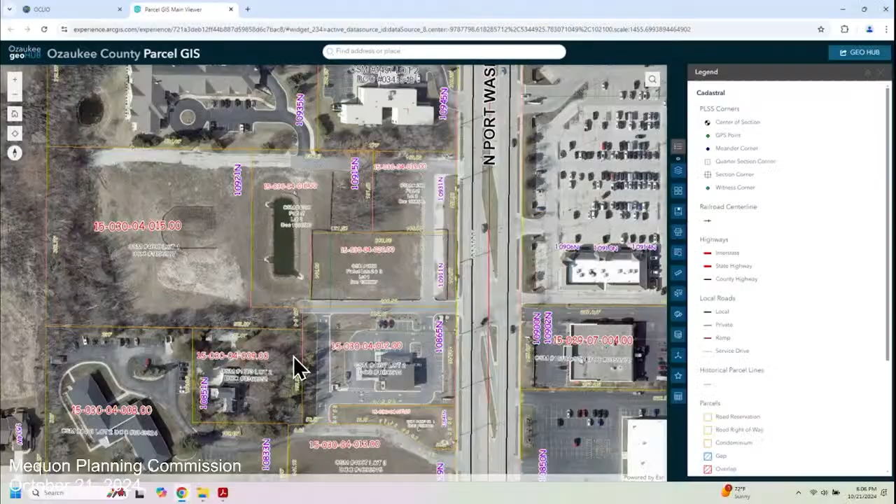There's been several accidents at this intersection. I don't want to point any fingers, like it's because of development and all that. That's the nature of development, okay.

Then the state or Ozaukee County put in a left turning lane on northbound Port Washington, turning into the Landmark Bank / Arby's area. Now when you have a car there trying to turn into, I don't want to pick on Arby's, but I'll pick it because everyone knows where Arby's is.

You turn into Arby's, somebody's trying to come out of Landmark, somebody's trying to get out of the pavilion, and what do you typically have at a daycare center between 4:30 and 6? I don't know the exact times, but that's usually because people are coming home, they're rushing, trying to pick up their kids.

So the intersection is going to become very, very busy, and I'm really concerned that we're going to have a lot more accidents there. I mean, it happens at least 3 to 4 times a week.

We can hear inside our facility people laying on their horns and screeching the brakes. We're waiting, we all kind of wait for the bang. The intersection is getting too many cars going through it without it being controlled.

I'll be upfront with you, I don't think a controlled intersection would be the right thing either, because I think it would end up backing up traffic all the way down the boulevard, all the way into Sendik's. So I don't think a controlled intersection is the right thing, because we already have a lot of controlled intersections on Port Washington. What I would like to propose is that, because it's a less used crossway...

...to divert the child daycare center traffic behind Landmark all the way to the road that has the car wash on it, and have them go through that, because that links on the east side of the road to Stein Gardens. And Stein Gardens has multiple egresses and ingresses, and quite frankly, Stein Gardens is busy.

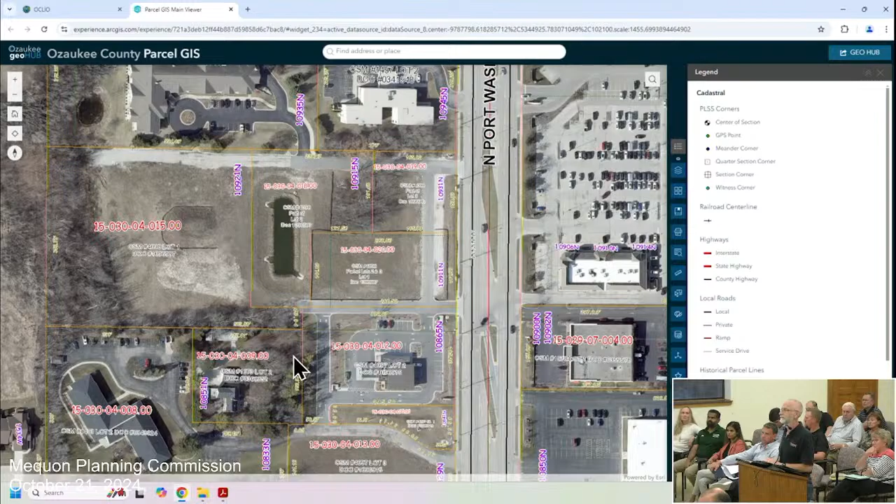Unless it's a doggy daycare, then I would push back. But that would be my only concern, and I believe there is a road behind Landmark that allows you to divert the traffic there. I just wanted to voice my concern, and I do appreciate you taking the time to listen to me. Thank you. Great, thank you.

We'll address that in the staff comments and talk about what our options are. So I think we have a motion and a second to close public hearing.

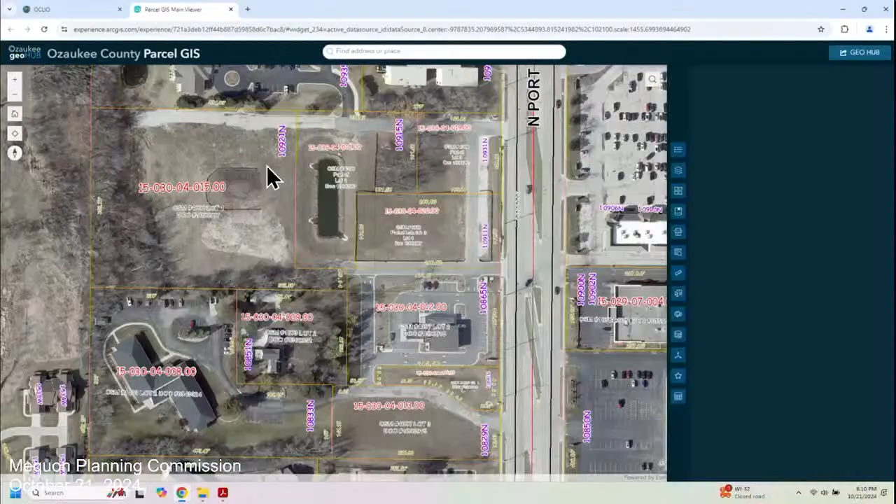All right, we're now taking up that item. I guess before I get to the report, I have the ortho up of that area, just to give some site context. Basically, the facility will be going into this location in the back here.

And then, as you recall, at our last meeting, we approved the concept plan amendment to split this in two. So this lower part will remain vacant.

In terms of access, this is a PUD. We established access a long time ago with this project. We have an access point to the furthest to the north. This is right in, right out. There's cross access through here.

This is the main lane I think he was speaking to. There's also a lane here that goes down, and then that basically just comes out on Port Washington Road next to the car wash, which he was speaking to.

I think what he's asking is to cut this off somehow, and I don't think we'd support that. I think the way this is laid out, it gives customers at any of the different facilities multiple ways to get in and out in case there is a backlog. So if the childcare facility is here, they would have the ability to go out this way as a right in, right out. They'd have the ability to come through the middle, and they'd have the ability to come through here. So we're providing 3 access points for this development and for all the other developments in the area.

I'll also say that this is a county highway. We don't really have jurisdiction over this road. They approved the curb cuts at the time when this was originally established, so I'm not sure if it'd be up to them to determine whether any improvements are needed to that road. So before I get into the report, is there any questions about this access issue that I can address before I get into the actual meat of the report?

Alderman Parrish: For the Port Washington Road corridor study that Harwood Associates is working on right now as we speak, nor has it been approved yet, so we can certainly, we had a business owner express some legitimate concerns. It certainly is a very busy, uncontrolled turn, so everything he's saying is correct. I would be curious what our consultant would say, and maybe we even did something already, and we just haven't.

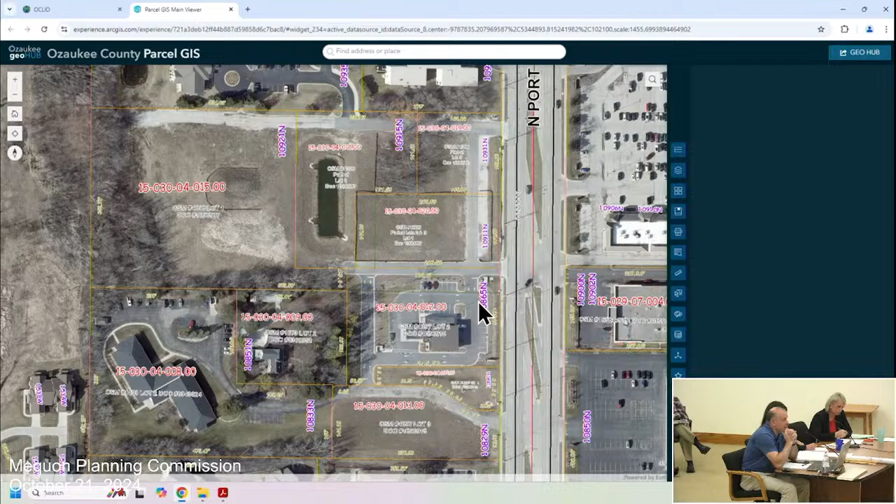The project for Port Washington Road was to try to pick spots that we felt were troubled intersections. At this time, this one did not raise to that level when we started, and there was no concern about it throughout that process. So this would be coming in kind of at the end of that process, basically. But we can talk to the county and see if they have any plans or concerns, or if there's any incident data there that we can maybe look at to address the issue in the future. I just don't think we can really tie it to this project because the PUD basically showed the road network.

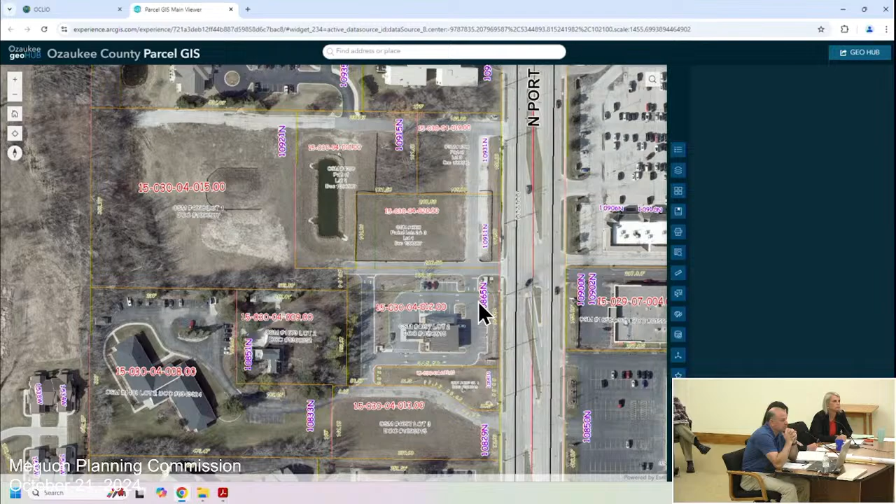No, I agree. It's separate from the project, and we haven't gotten into the presentation yet. I think the applicant has a bunch to say as well.

Jack, the request is that we consider a no U-turn sign at that intersection. So as we're reviewing the Port Washington Road corridor, as well as considering reaching out to the county, we could inquire as to whether that would be appropriate there or not. And regardless of this business going in or not, I think that would be a reasonable place to request that. They can make a U-turn just the next intersection down, no problem. Come back through where there's less traffic trying to get in and out of a busier complex.

Yeah, that we could request. That's not an issue. All right, great.

Commissioner Chorn: I think it'd be a strong suggestion that the daycare just inform the clients that there's multiple ways of getting out. Give them information so should they run into a problem, they've got other options.

Commissioner Barnes: I'll just speak as a former traffic engineer. I concur with what the current existing condition is. I'm sensitive, I understand what you're saying, but a signal would not be warranted here, even with the new traffic volumes from a numbers and collision basis, et cetera. And we need to be aware that a sign such as a no U-turn sign, I'm not opposed to it, but the reality is that if somebody wants to make a U-turn despite a sign, they're going to make it. I'm not saying that's correct, but it's real.

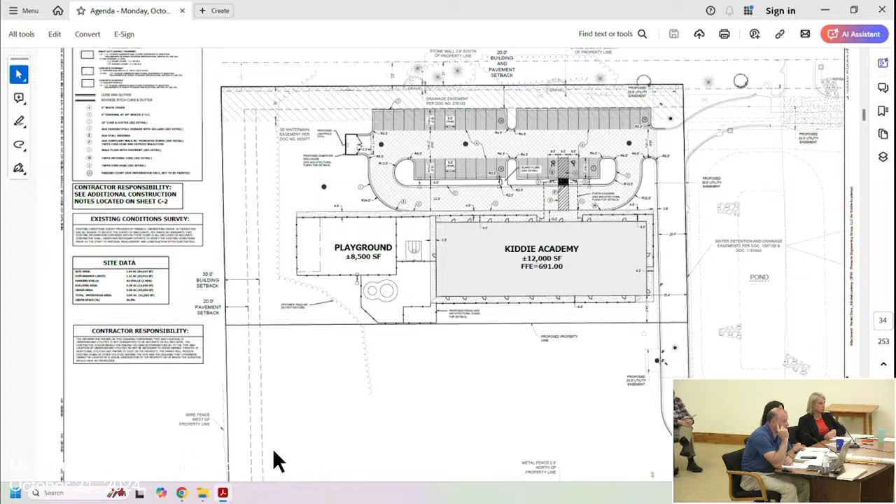Okay, additional feedback? The applicant, do you have anything to say?

Doesn't sound like there's any real objections to what the plan is. The majority of the discussion is just on the traffic, which isn't tied to your application one way or the other. Yeah, if you don't mind, if you can hear me. Sure, yep. Mark Seidel, Pinnacle Engineering Group, 20725 Watertown Road in Brookfield. I just want to speak real quick to the traffic item, just to give some color and background.

I was part of the design team that did the original overall development package. As part of that, I think it was 2018 or 2019, a rather comprehensive traffic study was undertaken and submitted to the county for review. Just to give a little clarity, this back parcel was once slated for an athletic club of 30,000 square feet, which is a lot higher density and higher trip generation than a childcare facility. At the time that was submitted and approved with the county, improvements were made to Port Road. So I just want to throw that out there, that the traffic study was complete and has a lot higher density user than what's proposed today.

Great. Staff has conditions on this for approval. Are you amenable to all the conditions listed by staff?

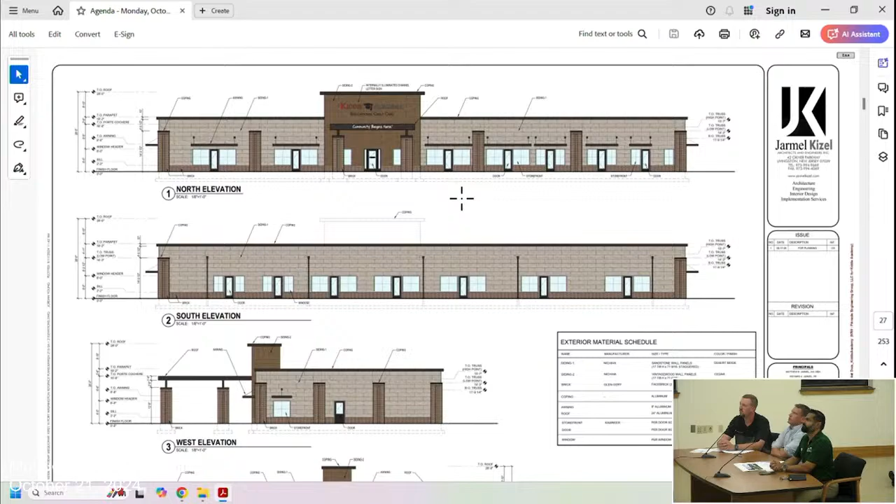I think one that we'd like to discuss is the front facade under the portico, where we show the wood grain lap siding coming down the front. I believe, Jack, you were asking about having brick coming up near the doorway underneath the portico.

No, I talked to the owner a little bit about this. I think there's a little confusion. Actually, my recommendation is for this whole middle section to be brick instead of the siding. There's a brick ledge that shows at the bottom, and it transitions into siding about at the same level as the rest of the brickwork. I just think as a focal point and an entryway into the facility, this would be more appropriate to be a primary material like brick.

So I think they're objecting to that, basically. I'll let Marty chime in if he likes. Commissioner Chorn has thoughts on this.

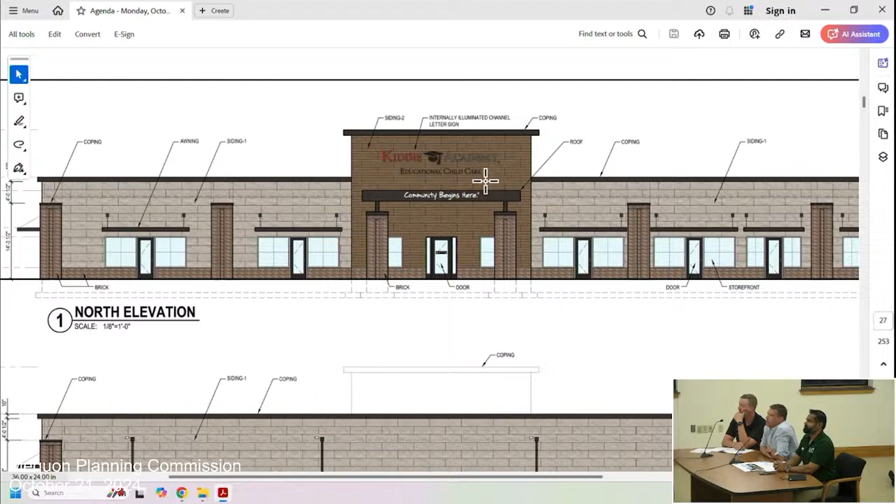Can you talk into the mic a little closer? I hate to argue with you, Jack, but I think the siding looks better. It's a different material, it's a highlight, it's a focal point right there, and I think it looks attractive. Like I said, with architecture, it's always subjective.

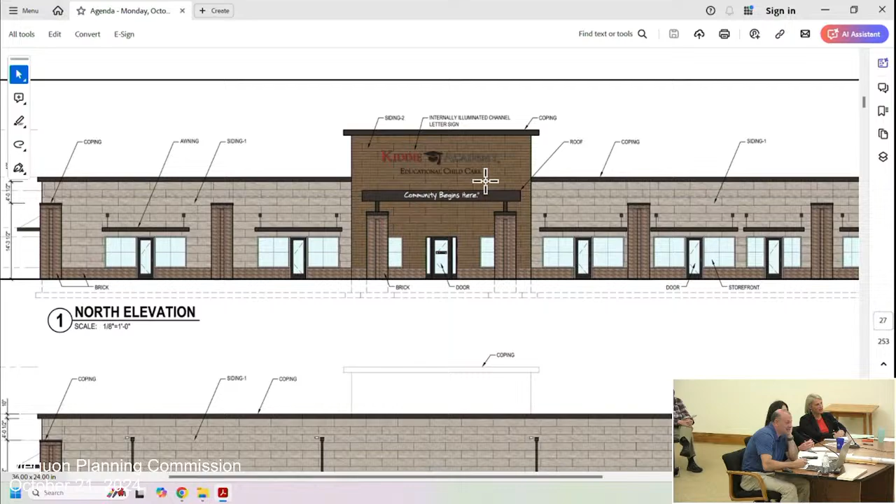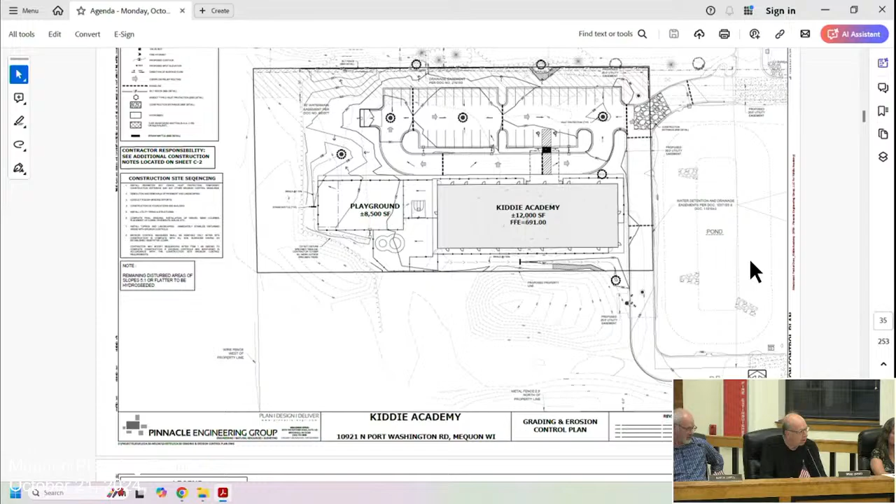Commissioner Barnes: Yeah, one other question I had was—I know one of the common challenges of a facility like this can be the parental drop-off and pickup, and the traffic routing through the site and backing up, if you will. Here we've got plenty of internal roadway, but my question is, because I didn't see anything in here, are you planning to sign or show it as a one-way only routing for parental drop-off? And how's that all going to work in terms of what I could foresee as some occasional congestion at morning drop-off or those kinds of things?

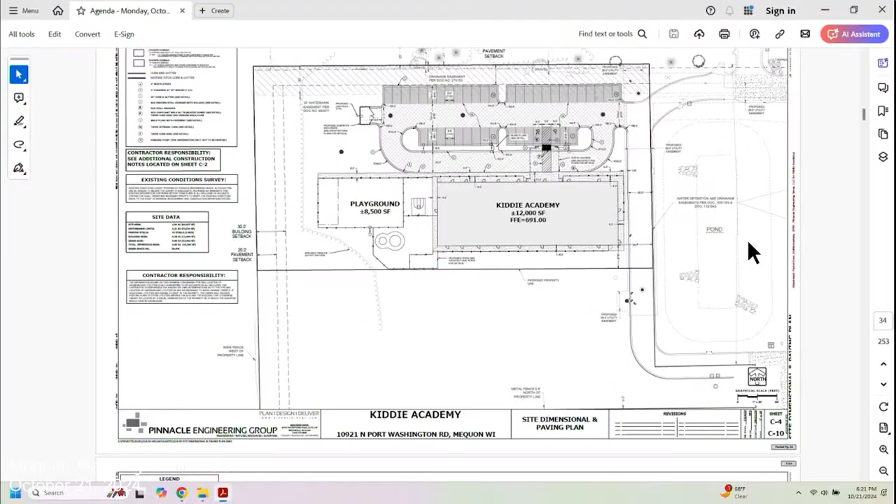Speaking of that, the way we had it in Brookfield was a turnaround at the entrance, and the highlight is that we mark with arrows how traffic flows within the facility. Safety of parents and kids has always been a prime concern, and in the city of Brookfield we are right off Capitol Drive.

Yes, traffic is fast on Capitol Drive, and while we don't have a slow-down lane, parents have known how to get onto the shoulder and into our facility. Capitol Drive is a DOT state highway. So I hear what the concerns were.

We've tried to address it in whatever ways we can. Just as Mark said, a study was done in the past for a larger facility, but in our case we have more than one way for parents to come in and out. The flow of traffic would be a turnaround: they come in from the top, come down, and go to the bottom to drop off their kids.

The portico provides a great place especially for parents of infants, where in rain and snow they don't have to take the kids outside in a car seat and get drenched along with their kid. That's been a great thing for our parents in Brookfield, and we've learned through that.

When they come, we don't allow parents to use that as a parking space. It's more like come in, drop off, and then move out—it's a moving place, not a parking place. Anyone who wants to park, we highly encourage them to go and park in the parking spot. If they want to meet or talk to our staff, they should park in the parking spot and then come in. That will not be a parking place.

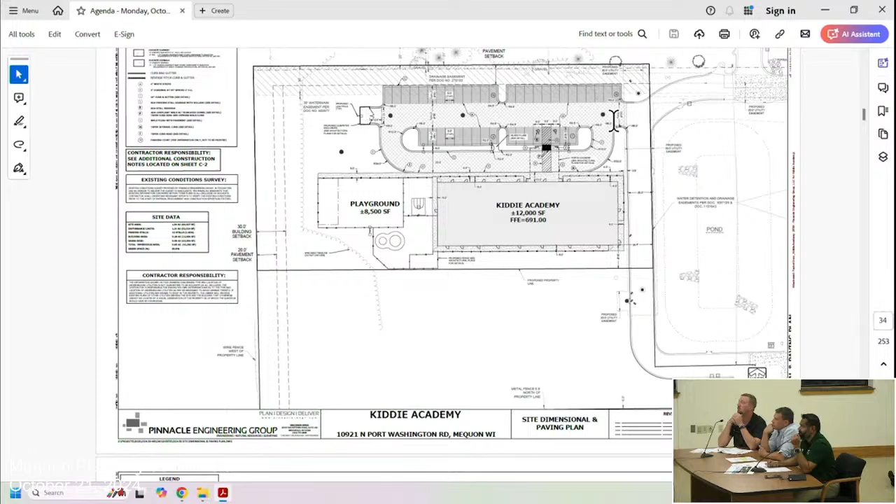Thanks, that covers what I was asking about, but I'm still a little concerned about the drop-off in the morning or pickup. Despite the one-way marked pattern, I know in a lot of areas parents like to take their kids into the building, and it's one of those things where a habit develops and congestion begins. So my question is, how do you intend to address that? What I'm guessing could be a likelihood, even over time—sure, there are early conditions, but over time there could be congestion in terms of getting in.

So with the parents, I can assure you on that part, we want safety of all our parents. We say that every kid is important in our daycare. It's not that any parent is special, any kid is special, right? It's everyone follows the rules.

So when they enroll, on the very first day, we let them know where the parking spot is, how you turn around, what exits you are going to use. We tell the parent about it, so there's no room for error where a parent would say they weren't aware. We tell them how we can make this place safe for kids, and that's the whole point of spending this much, having clear signs showing it to the parents.

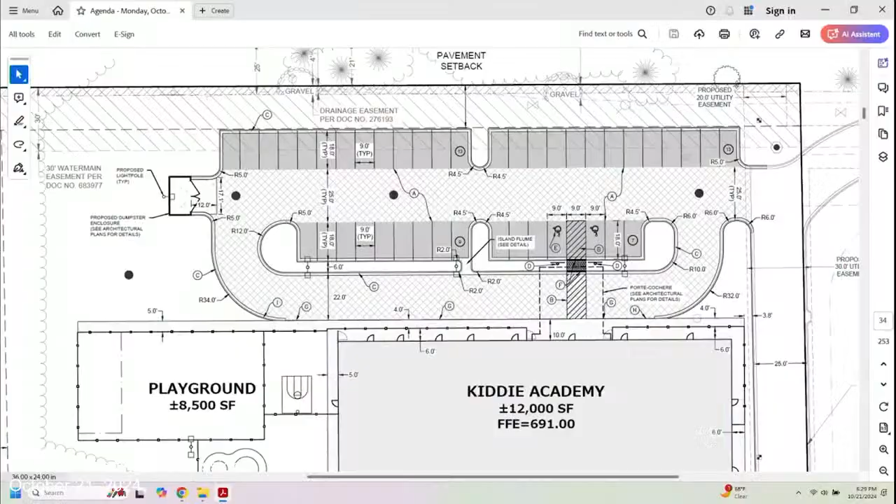I just want to make sure we're all on the same page with some of the recommendations. There's a sign waiver for a couple of signs. We're only recommending that the one waiver be granted for the height of the main sign. I can get to that page, I think I have to find it.

Call out the second sign if you could, please. Is that the 'community begins here' one? Yes, that's just a tagline, I don't think that's us. Well, it fits, and I'll show you the rendering. So this is what they're requesting: it shows the main sign located on the facade and then the second sign here. Our code only allows one sign, so this would be a secondary waiver sign. And then they're also looking for a size waiver for this sign, about 13 square feet larger than what's allowed. They're also looking for a height waiver.

The only thing we're recommending is the height waiver, because it might be a little low and could get blocked by that facade if people are driving in. But we don't see any hardship as the reason why they need a larger sign, it's really not visible from anywhere. I understand, speaking with the developer, he submitted an application today for our next meeting to have a shared monument sign with one of the properties on Port Washington Road to get some visibility there. So I don't think there's a necessary reason for that larger sign, and the second sign is again superfluous. It may not seem crazy to have that slogan there, but we can't regulate content, so it could say anything it wanted. So we're not supportive of that secondary sign either.

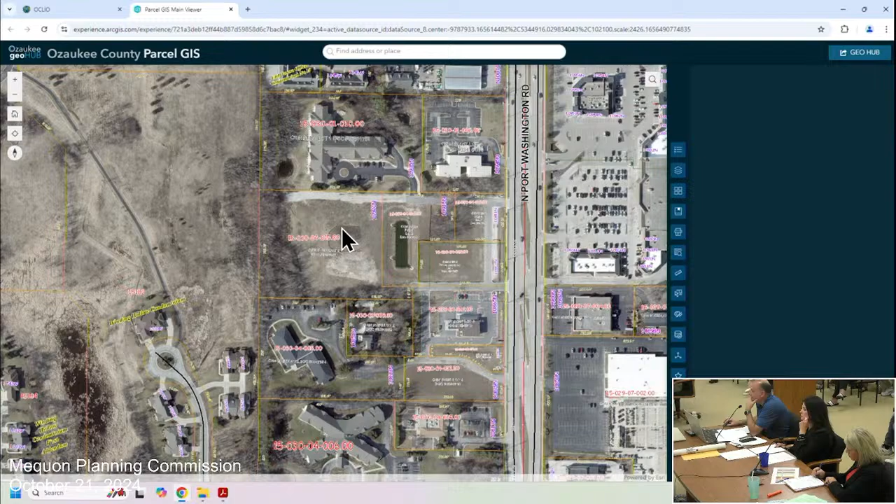I just want to make sure it was clear that we did not want pickleball or other noise going on after dusk in summer or winter. Yeah, pickleball, man—people get hot about that.

So you guys are aware of this, and we're all in agreement that would be a condition you'd agree to? Yes, we intended to have the play facility open until dusk anyway, not at dark. I mentioned to Jack that in summer the light is there until 8:30, so we would stop at 8, but in winter I wouldn't want anyone to go out and play ball after 4:30. 4:30? Okay, thank you.

I have something I would like to talk about regarding signs, especially related to what Bruce asked, if I may. Sure, let's give Commissioner Urbani a chance to speak first, and then you'll be next, okay?

Mine was related to what we were just talking about with sports after dark and the limit at dusk. I'm actually going to stand up for kids playing until 8 p.m., because I know it's pickleball and it does make noise. However, the applicant's information said there would be a maximum of 18 school-age kids within the facility, and I just don't think 18 kids is a problem. I want them to be able to play. Dusk comes at 4:30 in the winter. Last winter we hardly had any snow, and they could have been outside. I'd rather see kids outside as much as possible, and it sounds like that's your mission statement as well. I know pickleball is a tough one in this area, but at least let them be outside.

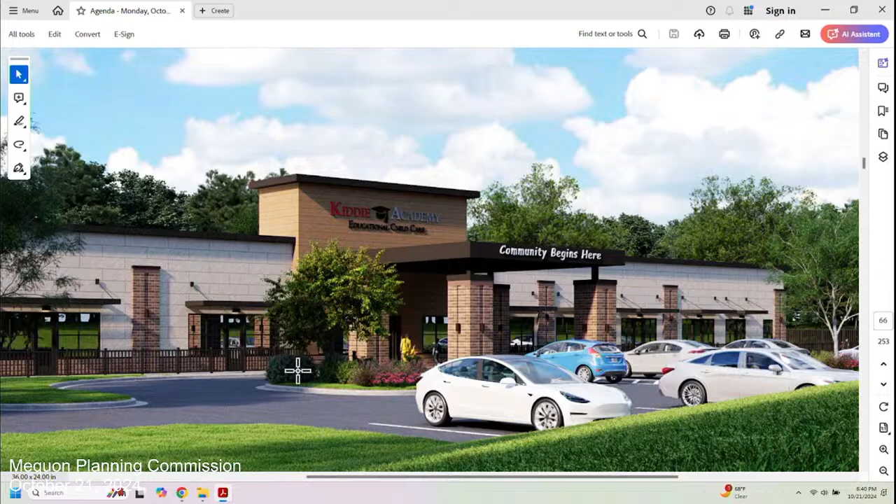So what's your formal ask? Just on the signage front, because we've talked a lot about the height—we've had a lot of discussion but we're not moving in a direction. I want to make sure we vote on this tonight. The signage requests on the height—we came to agreement on the size of the actual sign itself on the building, and then the second sign—how tall are the lower channel letters?

I worked in signage for 10 plus years, so—8 inches? 8 and a quarter inches. Okay.

I think you can, Jack, do you want to just talk about how sign size is calculated? Because I don't think the bottom letters are the biggest concern. I know that if you reduce those channel letters a little smaller, it's going to get to some point where those channel letters won't be able to be produced and lit appropriately. Yeah, for a sign we take the smallest polygon around the signage. So in this case you'd basically draw two polygons around each sign, and they're at 73.33 square feet. Our code is 60, so they're only 13 square feet over. I think you can do some other modifications to actually still make it work and still fit.

I appreciate his concern about fitting the scale of the building, because we're going to look at another one later this evening with the same issue. But we're not talking about a major reduction here—it's only 13 square feet. And if you can get creative with your polygons, you may be able to get something pretty close to what they're showing right now.

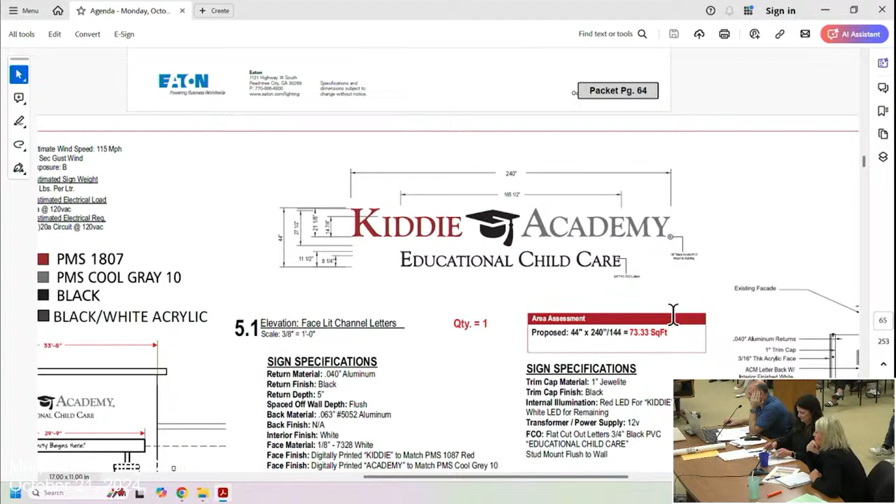Yeah, you could move them closer or do some other things. I think the sign can be reduced a little bit, and that was one of the questions I had when reading the packet, and this discussion kind of validated that. If that gets reduced just a little bit, it's going to essentially feel the same. You're not going for street frontage visibility. You've got access to that separate road.

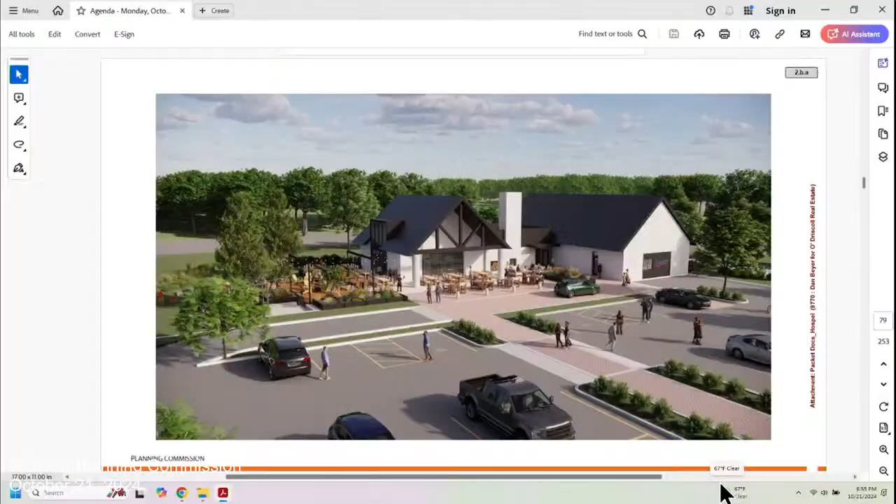The Ulao Creek Neighborhood Commercial Zoning District requires that those remain at 2,000 square feet or less. You are allowed to do a drive-through as long as it's part of a multi-tenant structure, which this is. At our prior meeting, we did a land division of the larger parent parcel to accommodate this development, so it's just over 3.5 acres. We found all of the conditions or the findings for a conditional use grant to be positive.

There's regulations, of course, to food and beverage services license-wise. It does meet all of the compatibility standards of the conditional use grants. And then in the Ulao Creek Neighborhood Commercial Zoning District, there are some additional requirements that we've tied to the conditional use grant. We have a condition regarding a 65 decibel maximum for the operations, particularly related to the menu board and outdoor activities.

We do recommend a small awning over that drive-through and walk-up window for the ice cream shop as part of that condition. One of the things the Ulao Creek Neighborhood District talked about was making sure the drive-through facilities were tucked to the rear. In this particular case, we're comfortable with that interior side for the drive-through, given the outdoor space and amenities along the Ulao Creek. We think this is a positive site layout, factoring in that walk-up window for the ice cream when the coffee shop closes and it transitions to the ice cream. We think that's a great location for that pickup window to be close to the public street.

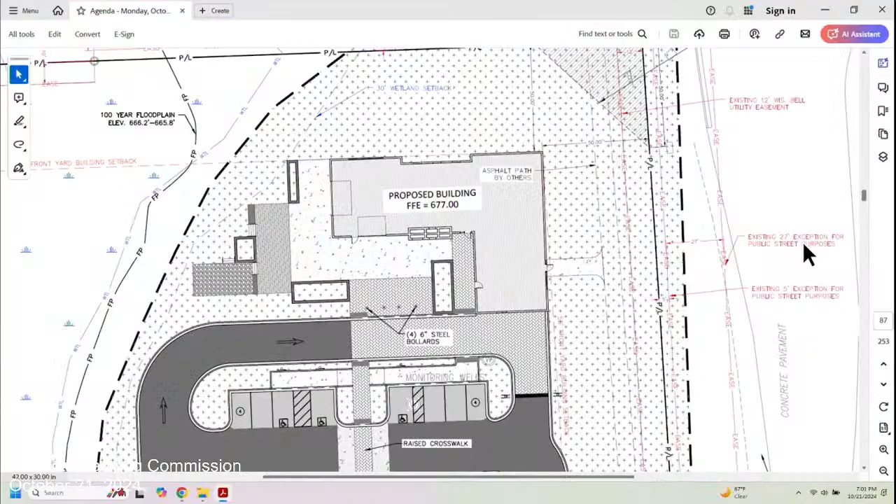Sure. So if you go to the site plan, Jack, we contemplated this internally. Can you zoom out a little bit? Park Superintendent Mike Geese and I discussed this as well, and we had some discussions with the development team. You can see at the very top part of the screen, that's the L-shaped building, the outdoor plaza, your patio areas directly to the west of that, and it's got quite a number of features.

And we're not sure exactly what that outdoor space will look like yet, but that is bumping up against the wetland on the property, which you can see to the west. There is a setback to the west. If you look on the grading plan all along that west property line until you get down to about where that dumpster location is, there is quite a bit of grade change. So when we look at trying to bring that linear pathway up to that outdoor patio space, it was becoming a little bit challenging and complicated.

And then when we looked immediately west of the very southwest corner of that property, there's very little open space that's usable, and that's actually on the property to the south piece, right? So the piece that's adjacent is to the south and runs up to the west here. So we just didn't think bringing the linear park any further up into this site was really going to create that much of a public benefit. The property to the south, again, contiguous to the west, is about 30 some acres, or maybe a little less than 30 acres. It is zoned for market rate housing development.

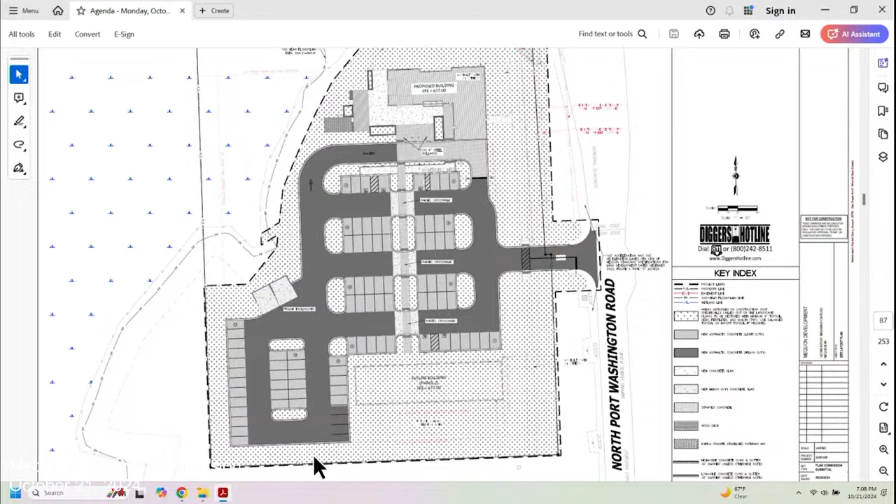New news. Yes. So if you go out there now and you look, the light that is furthest to the north has a new head on it, and it's full cutoff. Now there is some reflectivity because of the lens, but if you look at it compared to the other lights, you don't get that spotlight look to it.

The glare - so we worked with the lighting engineer, close to the hospital, and there was a new version that came out after that first version was in. So we replaced the one just to see what it was going to look like, and then budget-wise we'll have to figure out where we're going to get the money from, but we'll replace the other 5 that are out there. That new fixture will be required for not only there, but everywhere else.

So the new subdivision that's right next to the clinic, that'll have the new light, and then everybody else afterwards would have it. It's going to have a little bit of still glare because there's a globe, so you're still going to get some reflectivity from that globe. The only way you could get rid of that is if you just didn't have a globe, which we wanted to maintain a little bit more of an antique look to it, so it's going to have some globe. But if you go out there and look at the two, you can definitely see the difference between them. So, thanks, Jack.

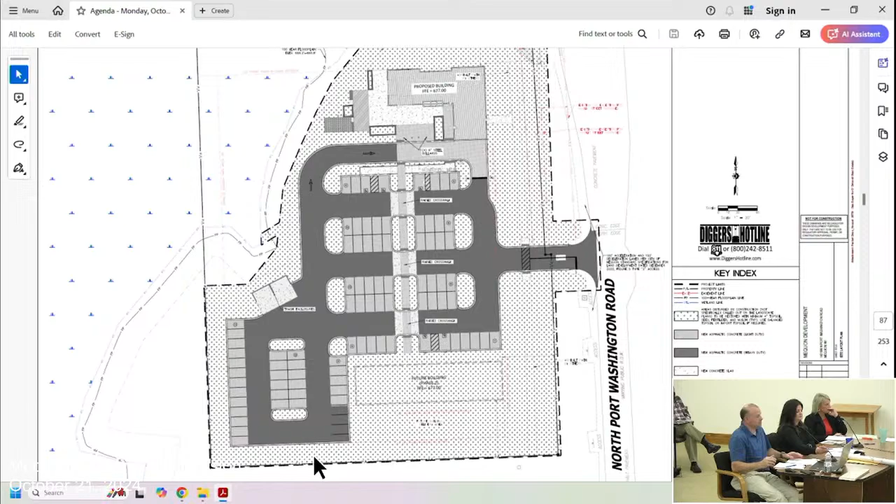Yeah. You mean multi-family to the south? Yes. Yes.

No, you could serve it privately. The city engineer has had discussions in the past with development proposals that are much further south in this corridor, and so there are ways to address that. That's probably not ideal from a private market attraction standpoint, but there are options. I know that's neither here nor there with this. I think multifamily is - it's always going to generate a lot of discussion. Well, yeah, and not to get into a full zoning conversation about that.

There are a lot of development and design standards tied to it. You can't be taller than 2 stories. You can't have stacked units. You can only have 4 units per building. The density's limited. The regulations in that zoning district are significant.

Yeah, and I recognize that. Just to clarify, so there's not confusion in the marketplace, it's not zoned multifamily, it's zoned for a variety of single-family uses, from senior to maybe senior 55-and-up apartments to a variety of housing product, correct? It's a variety of housing that's allowed. It's not restricted to 55 and older, though. Thank you. Great.

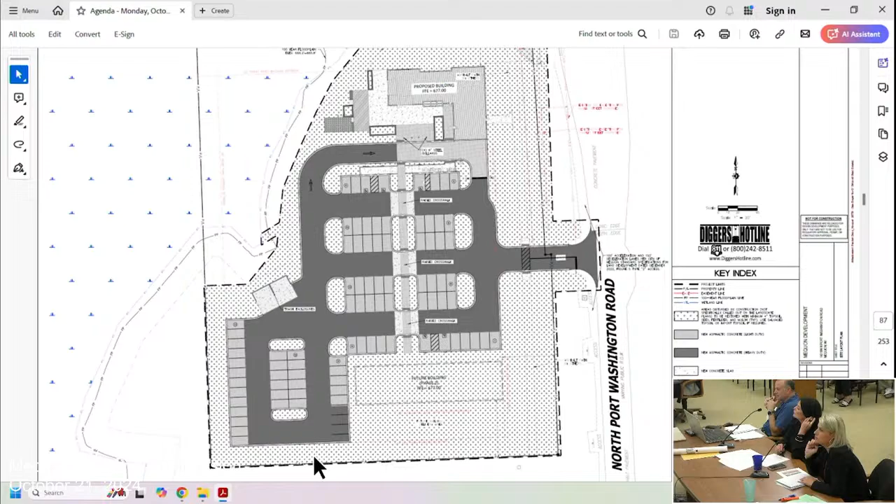My question came in with the parking. I was just up in Door County and went to One Barrel for a pizza, and on a Thursday night it was jammed. Everyone was eating outside, and you've got that really cool appeal for 'hey, I want to check out what's going on in that community,' and you're right off the highway. So I think you're going to get a lot of attention, and this is going to be very successful.

So what I do want to address is we were a little short of parking. We could address it with phase 2. I just wanted some discussion as to what that meant or how we accommodate for that, because they're not in a great spot for street parking, and it's going to be a cutoff for customers coming in if they can't park or get there via the path. Well, for this phase of the project, there's a minimum requirement of 60 stalls.

This exceeds the parking requirement for phase 1. I'm aware of that, but phase 2, the combined parking, they would have to add parking for phase 2 or come up with a less intense use, correct? Well, we don't know what the potential uses of phase 2 are, so it's a little bit difficult to gauge. So we won't know until we fully understand what phase 2 is.

Historically, what the Planning Commission has authorized is only build the 60, and we can approve what the site layout would look like to add the additional stalls if deemed needed. So I think, if and when this is up and operating, we'll get a better sense under phase 1 of what the true demand is.

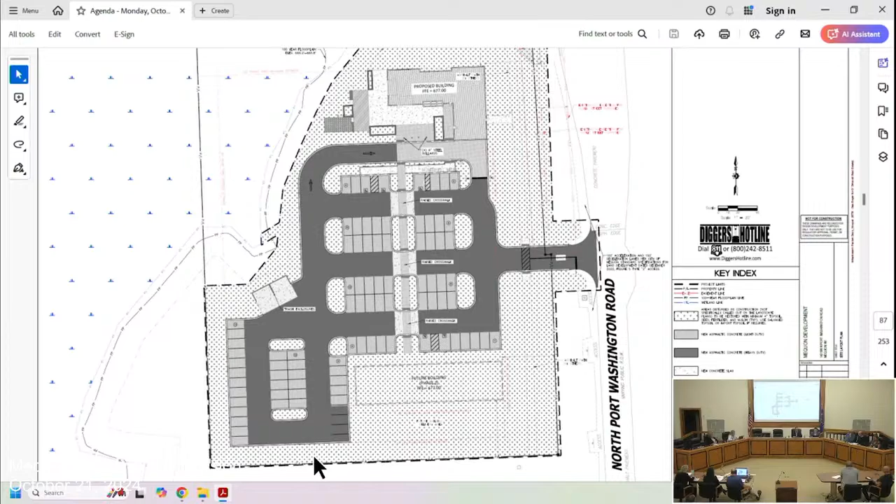I think ultimately what we're trying to do is mitigate any parking issues through the use of Phase 2 as the project gets developed. I just wanted to make sure you knew it was either limited or there was room for expansion, because for that use at site 2, I can easily see somebody coming forward wanting a restaurant - great square footage for your ROI - but then you may be limited with parking, and we're back discussing that. I wanted to address that a little tonight.

So, any other questions? Commissioner Barnes. Sorry, but I'd just like to reiterate my long-term concern that we're prepared to address that if need be in the future. As a city, if we're called by the police department for people parking illegally, we can work with them to enforce parking. I think there's going to be a little spillover at this parcel. Being a bicyclist myself, I like to park at the furthest end and ride to the other furthest end and back to get my full ride in.

Every inch counts, that's what I'm imagining. Depending on what we come up with regarding other developments, park space, and other things, I don't think it's reasonable to hinder the applicant or require them to allow public parking unless that's being discussed here. They're building a development, and allowing public parking isn't one of the conditions they have to meet. I don't see it as reasonable to require that of them at this time.

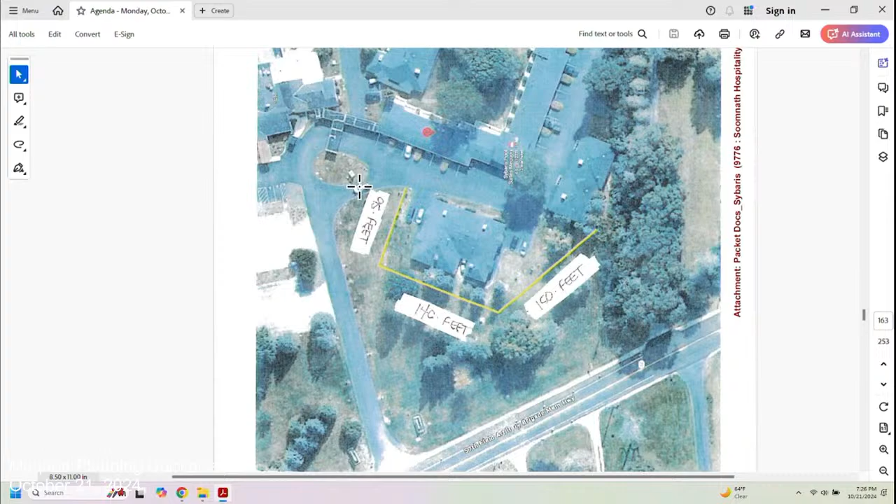The yellow line shows where the fencing is proposed. They are trying to direct traffic to the vehicular entrance, which is by that island right there. They do have security located at that location as well. The intent was really guest safety and guest privacy.

We did reach out to the police department and ask them to weigh in on the proposal. The feedback was that this will probably assist with directing foot traffic to that main entrance, and it doesn't impede the police department's ability to access the property or address any potential issues that would arise.

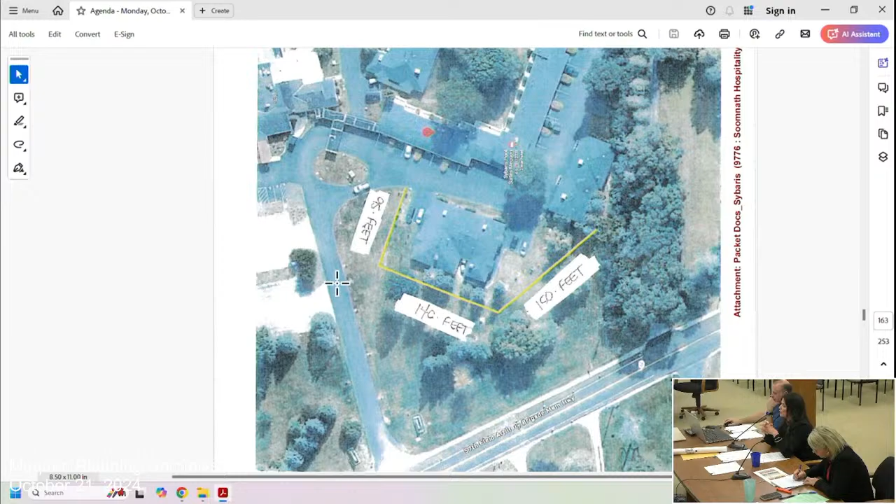Our proposal from a staff perspective is that when we have allowed fencing on commercial properties in the front yard, it has been ornamental in nature. One of the recent religious institutions on Mequon Road implemented some black aluminum fencing, and the data center on Port Washington Road also has some black decorative fence.

This was the proposal by the applicant. Staff is not supportive of a 6-foot tall, complete, 100% opaque fencing. We don't want to set a precedent for commercial development to have a 6-foot, 100% opaque fence in their front yard. So with the support of the police department, staff is recommending approval.

We do recommend that the fence not exceed 4.5 feet in height, and that it be an ornamental style fence that has some openings in it. We provided a couple of samples of what's been approved for other commercial development in the city.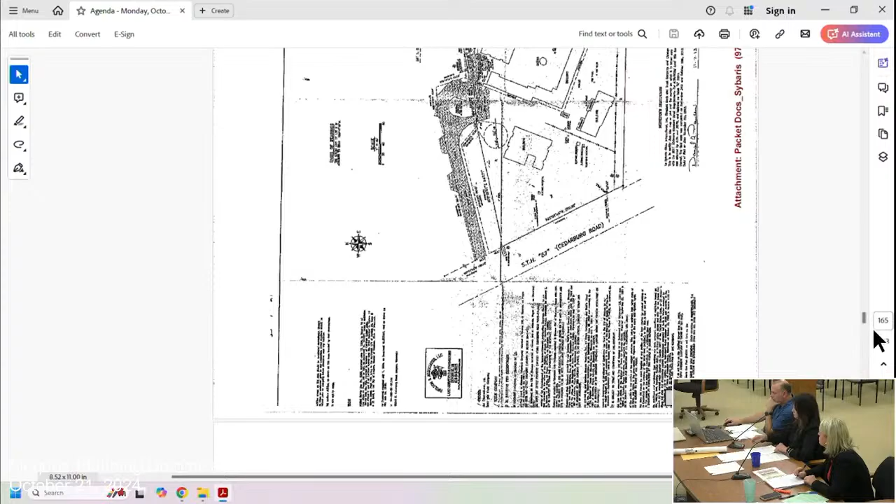And that style of fencing is acceptable to the applicant? Yes, the black aluminum fence, we'd be fine with that. We would just ask that it be allowed to be a little bit higher. I know in the recommendation it said 4.5 foot, but if we could do 6 foot, that'd be more what we're looking for.

Feedback from staff, they're looking for 6. We have a disagreement on height. We recommended 4.5. Are you opposed to 6 or 4.5? We recommended 4.5. Okay, yes. So you have a strong preference for 4.5, okay.

Commissioners? Did you say you had an example of what you're recommending? There are samples in the packet, just pictures of what's been approved, visually. It doesn't have to be exactly that. That or similar based on staff approval, correct?

Commissioner Chorin: I'm struggling a little bit to understand. You're looking for security and to isolate the user from the traffic, and so you have this now open fence. What's the point? Can't you do more with perhaps that kind of fence and some landscaping? I'm struggling to understand why this would work.

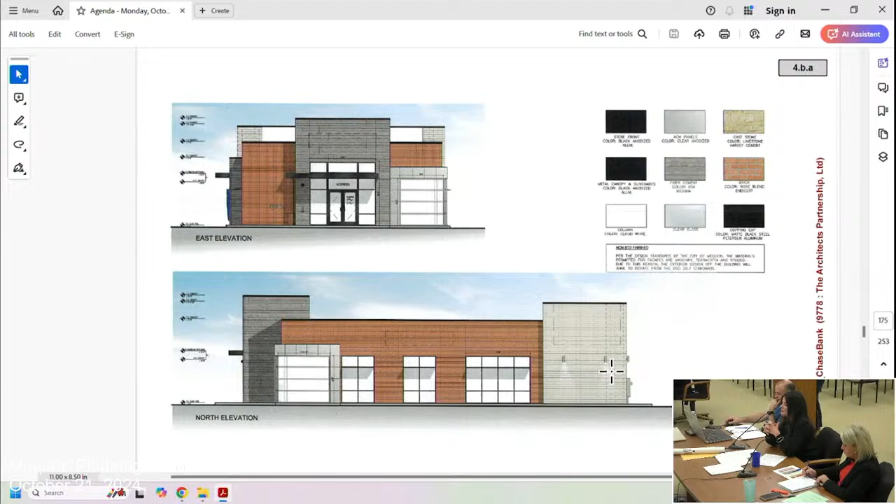So really, lighting plan, landscaping plan, we do have some minor recommendations about street trees. Engineering does have some conditions of approval that I do think Cole wants to review and go over with the Planning Commission. But we do support the project. We're recommending approval of the building and site plan. The use is permitted, so this is not a conditional use grant, so we're not really discussing operations or the land use in this particular case.

Yeah, just a couple of quick things on my end. Just informational that it'll be connecting to sewer and water. The bigger thing that we discussed with the applicant this morning is the access.

We do have a recommendation for a condition, that's number 9 in the packet here. Site shall have one access point to Towne Square Road, and that access point should be directly located across from a driveway on the north side of that street. That street is pretty encumbered with driveway entrances, and there's a concern of the vicinity to Port Washington Road as well. So we are recommending one access point, eliminating the east access point shown on there. They originally had it proposed as an exit only, but there's a concern with traffic coming in and out from Port Washington Road there.

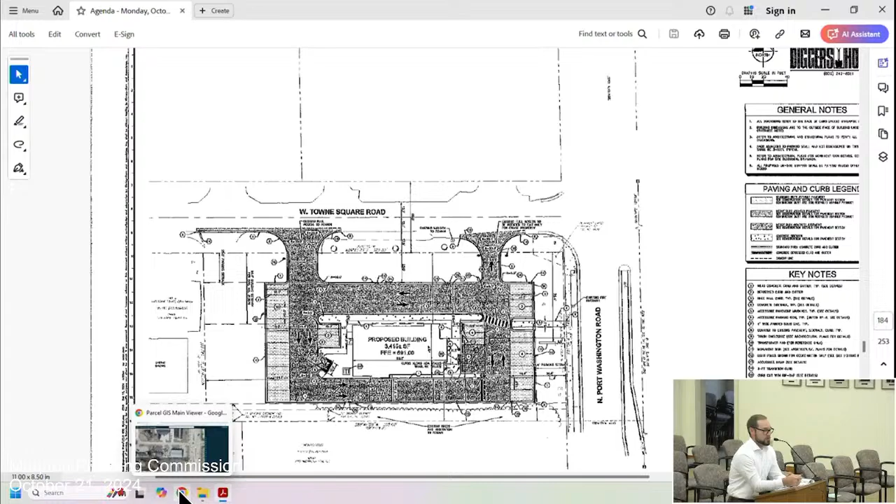As a former business owner that was in the building just north of that, I think that's a very good idea, because that's a challenging intersection, so that's great.

Applicant, any thoughts or feedback? Okay, it's on now. I think staff covered our project very well.

As Cole mentioned, we met this morning to discuss the site plan and the staff recommendation. We agree with all of the conditions of approval, except for item number 9. The site plan that you have in front of you shows the site existing today has 3 access points. We agree there should only be one full access point to this site, but on the site plan in front of you, we are also showing an exit only for customers to exit on the east side. From our discussions with Cole, we know this doesn't meet the 75-foot setback requirement from Port Washington Road. We would like further conversations with both Cole and the fire department to ensure we have adequate circulation and further discuss access point locations.

If we can't come to an agreement on the exit only second access point, we would like to discuss potentially moving the one full access driveway location more east. That way it's easier for customers who are going to the main building entryway or wrapping around to the ATM lane. We would like to just request that item number 9 give some flexibility, so that way we can discuss further with staff on the access point and locations.

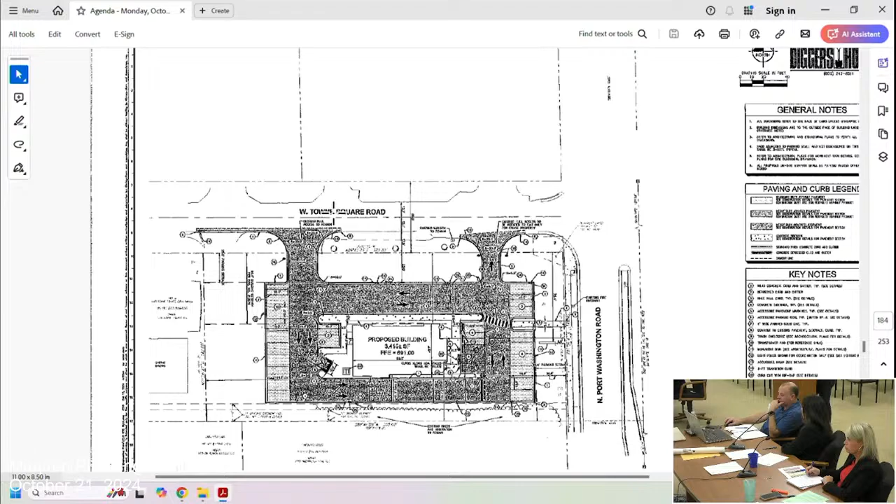A commissioner notes that with little feedback, there will be frustrated customers during peak traffic time wanting to exit where there's no room. As other commissioners have shared, it does back up there, and we're not trying to limit you or make it harder to conduct business. We're just highlighting based on our experience - I had a business there for 20 years. It does back up, it's tough to get out. I wouldn't even exit that way; I'd exit out and head west, out of the back entrance instead, because it would get so backed up.

So just be cautious of what you wish for. I would encourage the single entrance and exit to be a little bit wider in the middle to accommodate your request. But again, keep that traffic moving and address a traffic issue that's been ongoing with that section of road, and not encumber your future customers there. That would be my take, but again, I'm one vote up here, so we'll see what the other commissioners have to say.

Commissioner Parrish says: I'm not going to opine on the traffic yet. I'm going to talk about how the building looks. First, my preference would be for some of the other Chase Bank models. This feels like a comedy of errors - many of us dislike almost every single financial institution building on the corridor, as does the community. They lack character, they have flat roofs, and I don't know your architectural terms, fenestrations.

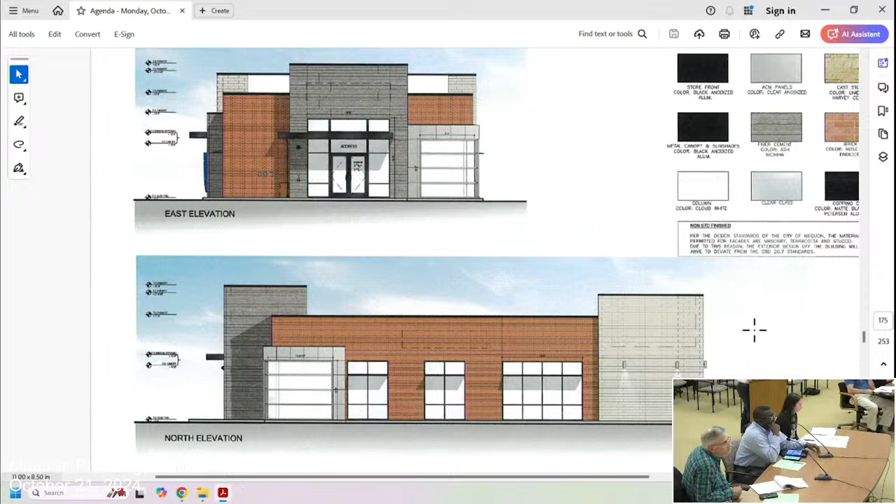Thank you. I'd like the Planning Commission to revisit this. I know you came to an inconclusive conclusion, but when you break it out into different building sizes, things are just out of scale. Let's keep working on the design standards for this corridor, otherwise the whole thing's going to be built out with structures no one wants. Please don't take my comments to mean we don't want your business here - we absolutely do and appreciate your investment. This is more on the design side, and we want this to happen.

The application here tonight is for building and site plan review, so the Planning Commission does have authority over architecture and design, should you choose to give direction toward a more traditional design.

Other people have their hands up. Commissioner Chorin, you're being called on whether you raised your hand or not, my friend. Right.

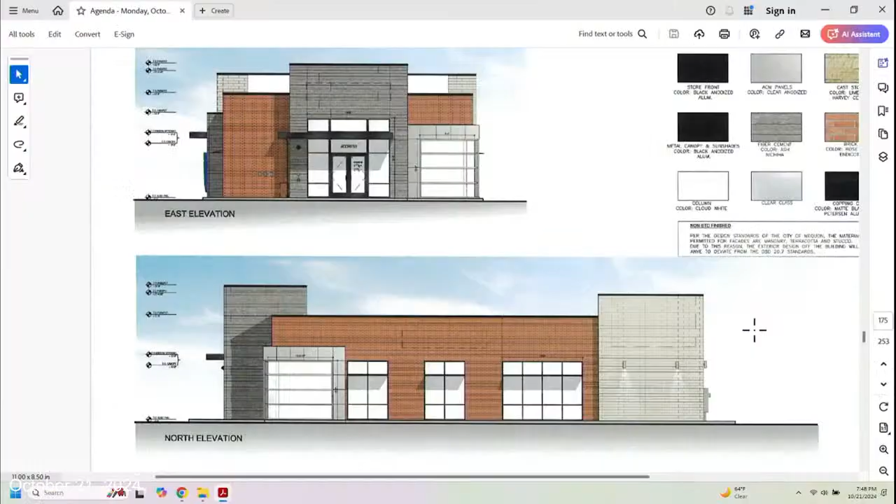Well, I'm struggling a little bit because when I look at that, it's noted as red brick, right? Yes, rose blend. That doesn't look like red brick. I'm not saying I dislike the building, it's just I can't get a real good perspective.

Is there a 3D model of this that we could see in actual material colors? Because if it's this color, that doesn't convey what we've been told it is. Yeah, it's more brownish orange on the screen.

No, the rose blend that we're using is matching the other characteristics of brickwork used within the same community, so we are not deviating from that. Well, I understand that, but I can't see that.

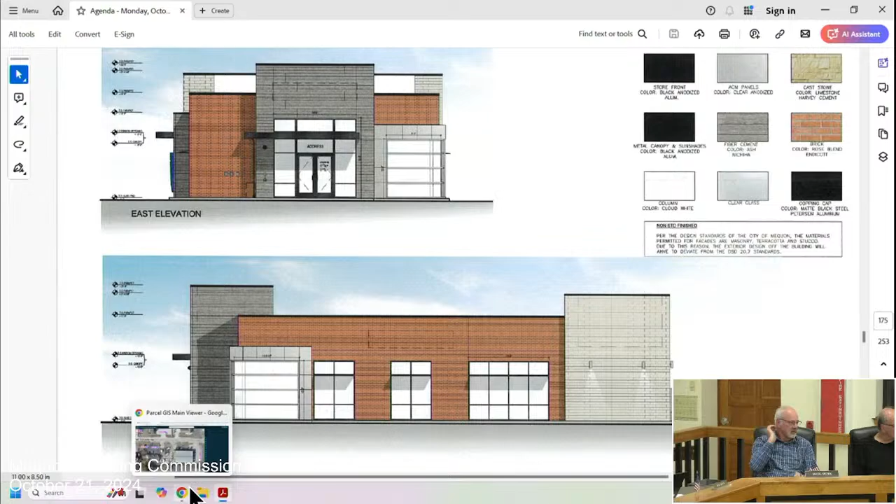Do we have a photo of that in another community in the packet? I do have one here which is much better, more clear. The traditional example has the red brick shown on it, page 179. That's built somewhere.

On that same rendering, there's... I thought that looks like the pavilion, it's perfect, ties in with across the street. That's what I'm saying, yeah.

So the question is, is the design of the building something that you want to see, or do you want to send them back with something more traditional? I've got some angst up here and no clear direction. I've got the same concern, but I personally would prefer to see something a little more traditional, tying in with what's in Germantown. But I'd like to give them concrete direction so it doesn't turn into an art show in a future meeting.

It's interesting when I look up, is this Germantown? No. Germantown is confused with... the Germantown one is identical except black and white. Okay, it's the wrong comparison, so go to 181.

Just something like that, it fits in. Page 181 or 179? Wait, yeah, 181, with a peaked roof. I think that's the critical piece, the peaked roof. Not for Germantown.

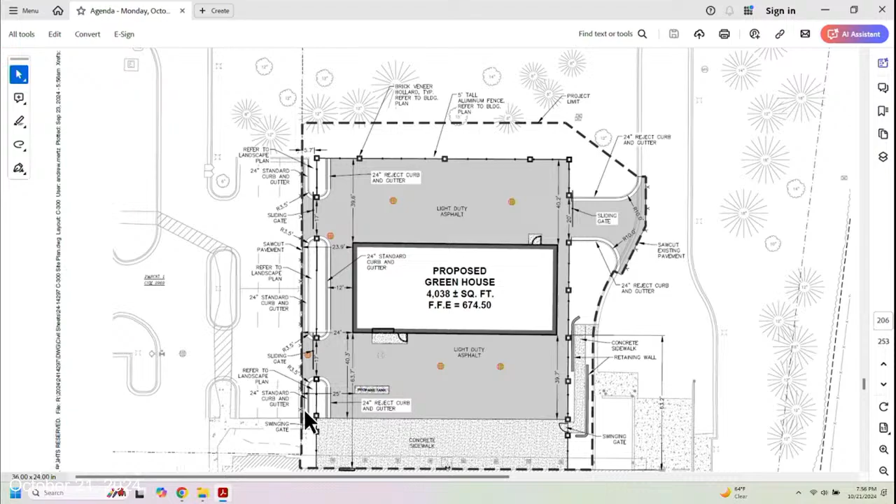As many of you may recall, when we talked about the temporary greenhouse and outdoor storage area, there's a property line that runs right through that parking lot, which I'm showing here with my cursor. So what they did, which I think was rather ingenious, they actually added new islands in this location, this location, and this location to segregate that parking area from their greenhouse area.

So this area actually technically is still public parking, but this area is all enclosed for their usage. So I think that was a good solution to the kind of odd problem that we've had with regard to where that lot line runs.

So what they're showing here is a couple islands with a gate that would allow customers to go in and get supplies or get deliveries in and out. There's also a gate in the back that connects to the loading dock.

There's a greenhouse in the center, and then they moved their propane tank to basically the middle front of the section. They're enclosing the area with a 5-foot fence with brick pillars to match the existing building, and then they're showing landscaping in the front and some wall packs and exterior lighting.

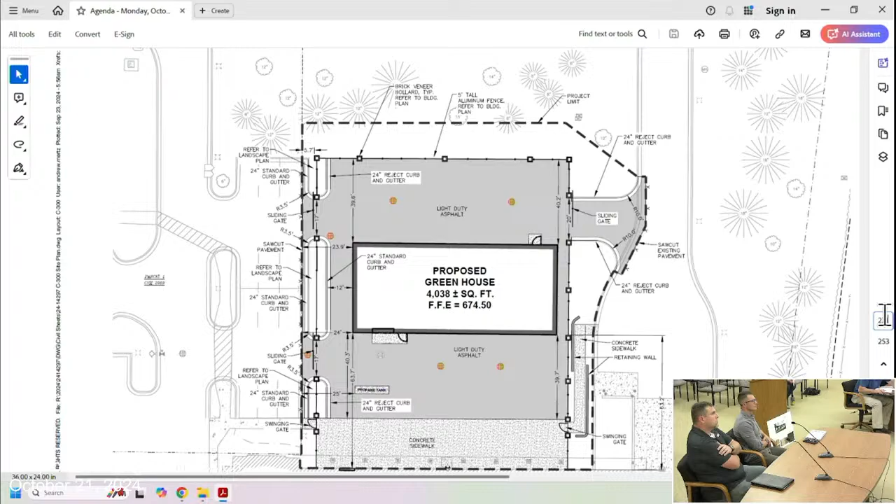I'll go to the rendering. If I can read my writing. So this is what it would look like from the parking lot, basically.

So you see the greenhouse, which is all glass except for the lowest panel. You see the fencing and the openings for the gates, and then the islands. I think they did a nice job with this, and we're supportive of it and recommend approval.

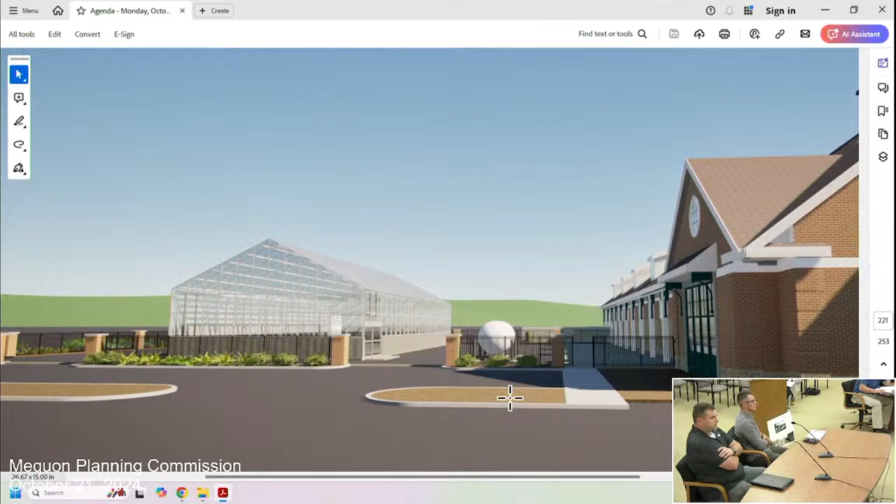I just had one question. I saw a greenhouse in a different community, and it was illuminated at night, and it really lit up the sky pretty bright. So I just wanted to know if, or how, we were going to address that.

I guess they're allowed to have it illuminated during their hours of operation. So in wintertime, I guess, I don't know if it'd be functional in wintertime or not, but as long as they're open for business, they would be allowed to have it lit up.

Now, we could put some limitations on that. I'm not sure exactly what that would be offhand, but if there's some condition you want to add, we can address the issue if need be, and look into it a little bit more in detail.

I love the use. I'm glad that you came forward with this, and I think it fits in perfectly with what you're doing. I just want to make sure the lighting's addressed.

Yeah, absolutely. The lighting within the greenhouse will be less lumens than the parking lot lighting in the surrounding area, and they would strictly be down lights inside the greenhouse itself. There would be wall packs on the building that illuminate the garden center, as well as some light posts and other parts.

Are you anticipating that it meets the standard code? Or are you anticipating year-round usage, or just seasonal in the summer?

It'll be year-round usage, I mean, to a much lesser extent during the winter. So in the winter, really the only use in there... we're not going to be growing anything in there.

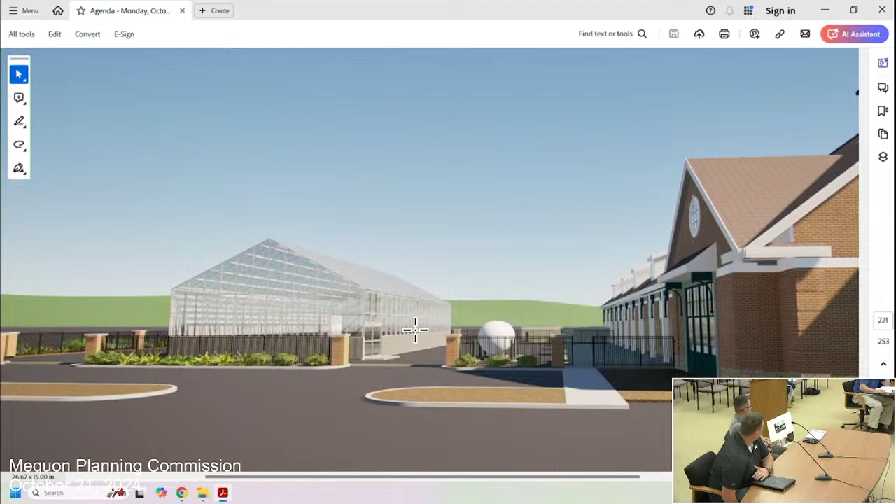The issue is the interior lighting of the greenhouse itself, which we don't typically address. As long as they're meeting their state requirements to illuminate public space, I don't think we can really control it too much beyond that. I think it'd actually be kind of a nice feature to have, especially from the road, to see that lit up at night.

It'd be kind of cool, I think. Even with downlighting, it's going to be lit up and it's going to look great.

I'm just concerned - the place I drove by had the grow lights on and it was super bright, almost like stadium lighting. It was a lot brighter than expected, and I just want to make sure we're talking about this so we don't get any complaints. You're a great business, and I want to make sure you succeed.

So, no grow lighting - strictly retail sales type lighting in there. I'm sure we can come up with a standard for interior illumination based on building code requirements. If you want to just add that as a condition, we can work that out at staff level.

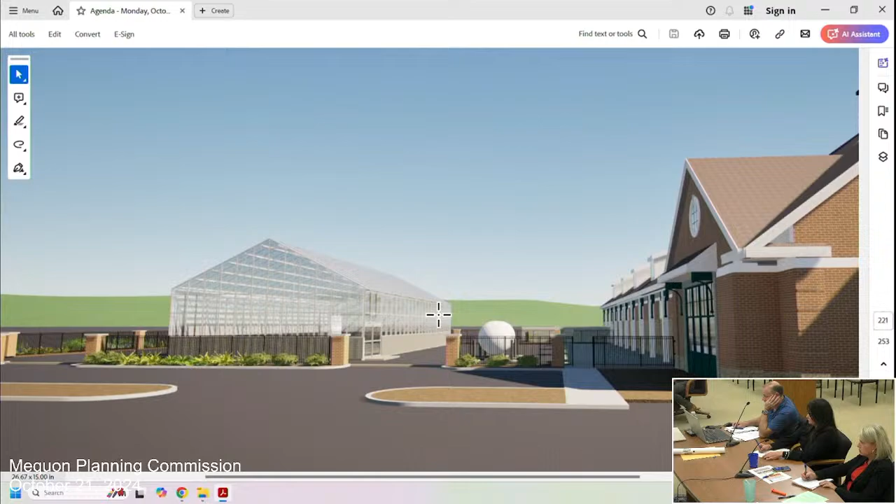I would be fine with conditions at staff level and just working it through. I'm not looking for it to be overly restrictive - I just want to address the concern that it could turn into a beacon at night, seen from the highway looking like stadium lighting. That's not what we're looking to achieve here.

That's very where I was at - little will be seen from the highway, just with the elevations, because of the berms and the trees in the back along the freeway.

Commissioner Schaefer, make a motion. I would move approval per staff's conditions with the additional condition that there's some discussion related to the interior illumination of the greenhouse area.

And staff approval of that. Second. Motion and a second. Any additional discussion? All those in favor say aye. Any opposed? That motion carries.

Thank you. Looking forward to seeing that.

Next item is Bauer Sign and Lighting for Mequon Marketplace Holdings LLC. The applicant is seeking minor approval to allow a master sign plan for the property located at 11300 North Port Washington Road, Hahn Ace and Planet Fitness. Some of you may recall conversations during the building and site plan approval process about this coming forward.

I have renderings of the wall signs on the screen - it's a bit tough to see, but they're looking for a wall sign for each individual tenant. Our code for a multi-tenant building only allows 30 square feet. This proposal for the Ace is 29.6 square feet.

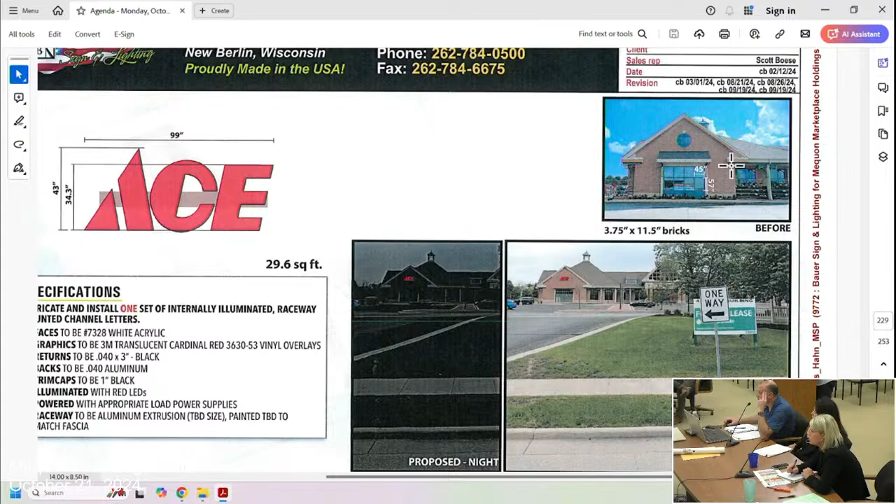I got a question. In each of those gable ends, there's the existing round window and the shed, we'll call it an awning, over the windows, right? Yes, those are both going to be removed. In fact, they're already gone. We approved the building and changes to that previously. So if you look, I'll pull up the ACE one.

That's the backside window remaining, off of 43. So this is basically the front one. I'll zoom in as much as I can. So this is what it would look like now.

Originally we were a little concerned about that, but if you look at the other buildings, this is the only building that had that shed roof on it. The rest didn't have that, and they actually had their sign location there, so it made sense. I just wanted to make sure they fill in those windows with matching brick so it doesn't look out of place. I think it's a good location for it.

It was originally built as a one-tenant building, so if this were a 3 or 4 tenant building, we'd probably have issues figuring out where the signage goes. But with 2 tenants and fairly large tenants, I think it balances out pretty well overall.

Great job. Any additional feedback? Or a motion? Make a motion for approval per staff's comments.

Got a motion, a second on the table. Any additional discussion? Seeing none, all those in favor say aye. Aye. Any opposed? That passes. Congratulations on the signage.

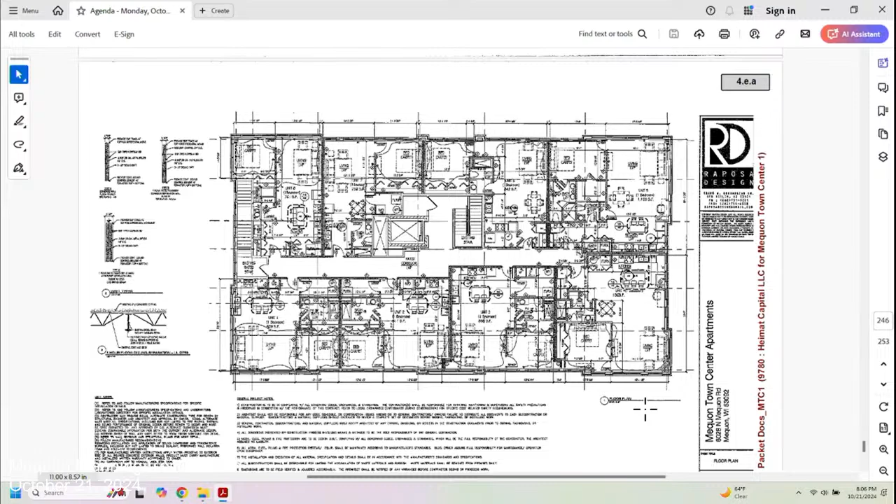As stated in the report, many of you may recall the planning commission approved the conversion of the second floor in the south building from commercial to residential. There are 8 units being proposed. It already complies with the PUD, which allowed up to 50 units on site, and they only had, I believe, 28 total, so they're still in compliance.

At the time this was approved, a traffic analysis was done. Most of the time it was a benefit to commercial users that parking demand would go down. There was only one small window, between 6 and 8 on Saturdays, where demand would actually go up, because at that time there were more residents around than business, since traditional office users would be gone by then. So this was approved, and staff still recommends approval of it.

We did add a condition in the last version, which we're retaining in this one, that the 8 individual tenants have one assigned parking stall in the indoor space located in the north building. We feel it's more appropriate to have these residential users taking up space indoors versus taking up spaces near some of the commercial entities.

So we recommend approval. As Kim stated earlier, we reconfigured our parking lot, so now we have ample outdoor parking for residents or guests visiting the site behind City Hall, with a shared parking agreement that allows that. Plus there's an additional 50 stalls along Cedarburg Road and other places in the town center. So we still recommend approval, in accordance with the conditions in the report.

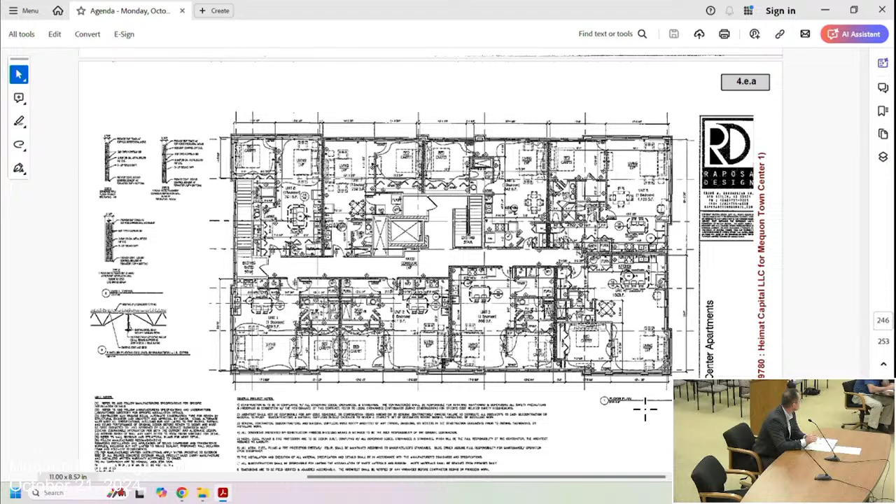Well, that was one of the conditions we had previously added to the last approval. There were a couple site issues we wanted to address, and that came up at the time. So we took the initiative to get that done, and they did it kind of concurrently with the renovation. The renovation stopped, but they kept going and did relocate the dumpster. Good job, I just wanted to make sure it was compliant. Yeah, because they're buying it - that's their expectation. We thought the current location is a much better location, a little further away from some of the tenants. That's great, it looks good I think.

Commissioner Barnes.

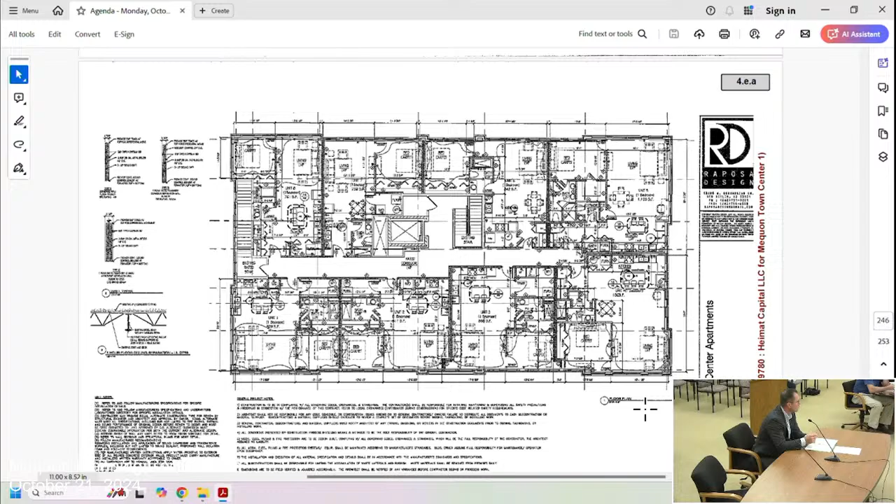I support the plan, and I think it's a great improvement for the area. The one thing, looking at the traffic report, that's still an outstanding concern in light of the public comments is the parking supply available, despite the fact that there's some parking available at City Hall. Could there be residents who aren't commuting like reported in the traffic study, who stay during the midday instead of emptying out to accommodate retail, and they're parked there, creating a potential conflict of parking needs?

What concern do you want addressed? It's purely an idea that crossed my mind - is there something about parking identifiers for residents, some rules about where they can be located? I had the same question. I wanted to know how you're going to identify resident parking and make sure that was being enforced, as I know there's been some concern.

Certainly, if I may comment - by no means do we have the perfect solution yet, but in interviewing tenants as part of our due diligence process, we realized that historically there were some concerns.